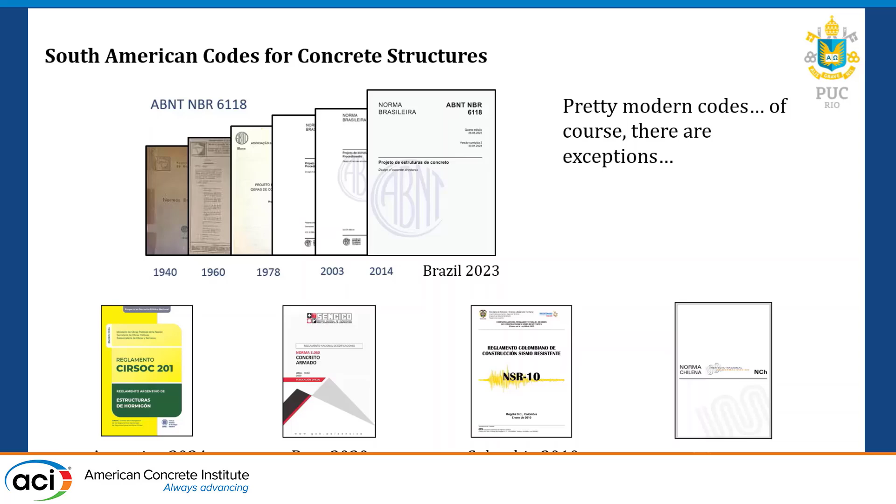Also, if you take a look into the codes in South America, you see that they are pretty recent and pretty modern codes. Of course, there are exceptions. I was talking to a friend from Uruguay, and he told me that the first concrete structures code in Uruguay was released in 2001, and it doesn't include prestressed concrete. And he told me, Mira, Daniel, we don't have anything about FRP here. Our code was born old, just like Benjamin Button. So we have exceptions, of course.

In South America, before 2018, we didn't have anything, just one manufacturer of FRP, and the main application was in soft eyes for tunnel constructions, and eventually on industrial projects. In 2018, for some reason that I don't know, suppliers started to bring FRP bars from Russia to Brazil, and we saw a proliferation of FRP bars in Brazil. And after 2018, with the pandemic and the higher cost of steel, people started to pay attention to FRP, but actually not for the right reasons. They are trying to reduce the costs.

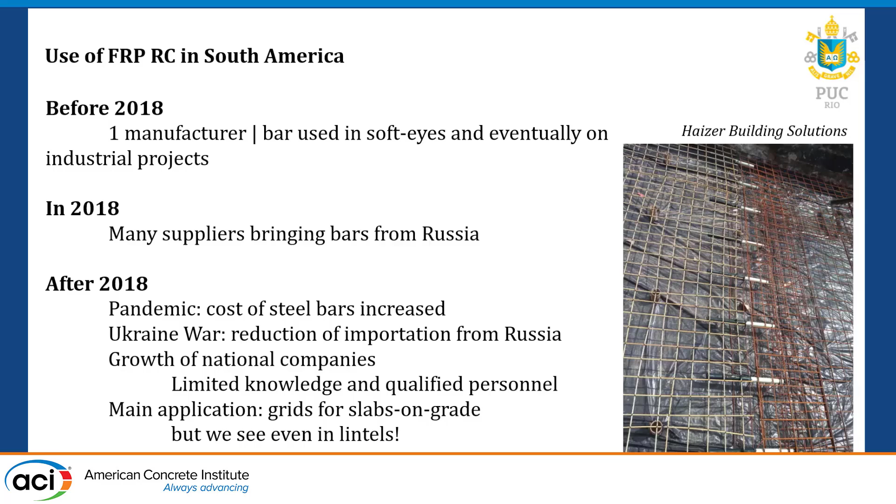And after we had the Ukraine war, which increased the cost of FRP bars imported from Russia, we saw growth of national companies, and we see that we have limited knowledge and qualified personnel. And what we see right now is the main application is grids for slabs on grade. But we see applications even on lintels. It's just a variety of applications.

So about the timeline of our code, this is mainly the FRP reinforced concrete code. In 2015, we had the installation of the IBRACON/ABECE TC 303. Ibracon is the poorer brother of ACI in Brazil. It's basically non-conventional materials for concrete structures. We have 5 working groups, and the third one is about FRP-RC. In 2019, we had that working group restarted after a long break.

In 2021, we developed a manual of practice, what you can see on the right. And after this manual was released, we installed a Brazilian Standard Association committee to develop 2 standards, one for material specification and testing, and the other one for structural design. And it's going to be released for public review in the next month or so.

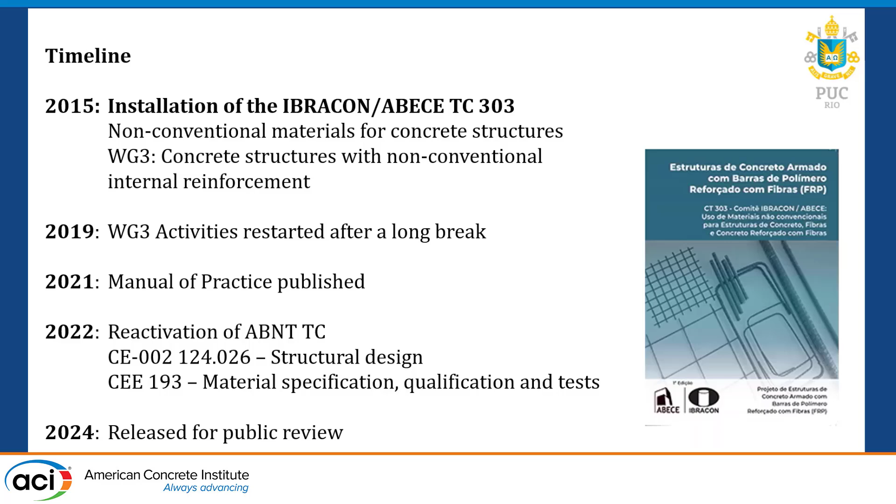So, main non-technical challenges. We have few researchers involved with FRP composites for concrete in Brazil. Limited technical data available in the country. Lack of knowledge of the community about composites in general. And also the industry flagship is basically grids and dowel bars, and we don't have a lot of data on that, so they are not very happy. They would like to see grids in the code, and I told them, please wait, let's release this, and then we start looking into this topic.

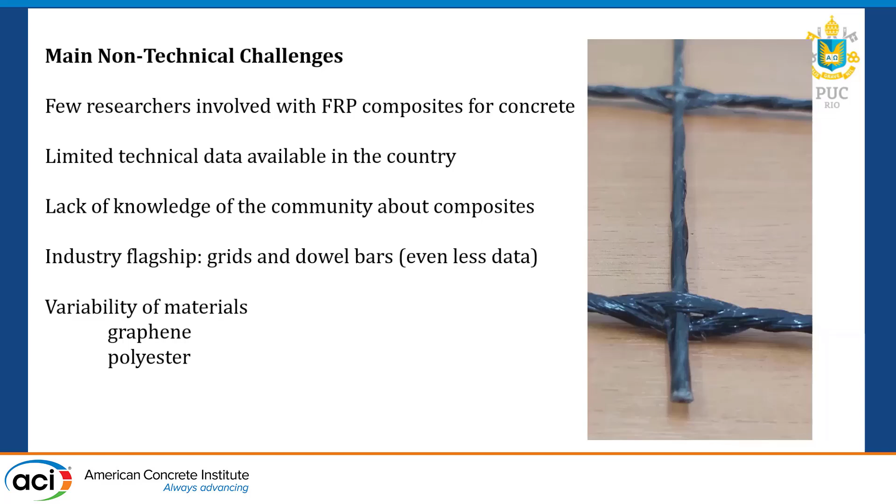And also variability of materials. There is a manufacturer saying that he's using graphene in the bars to increase the modulus. I really don't know if it works or not, but he's saying he used it. And a lot of manufacturers are trying to use polyester-based materials, which we know don't work well. Here you can see some pictures. The quality of the stirrups, we can see, is not very good in some of the cases.

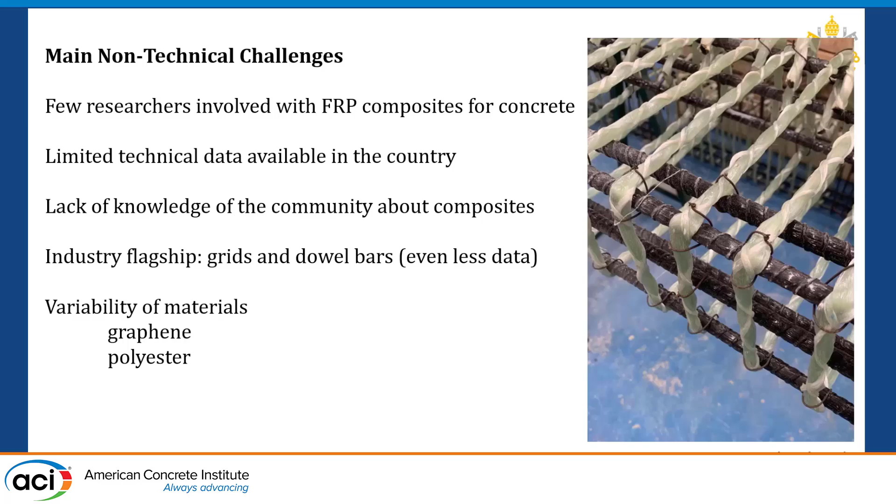So the scope of the codes: we are working with concrete with strength up to 50 MPa, with or without fibers.

We have vinyl ester and epoxy-based bars, bars with surface treatment meeting minimum requirements, physical and mechanical requirements. We allow combination of steel and FRP in the code as well, and temperatures below 80 degrees Celsius. No pre-stressing, no bundles, no hollow bars, or split cross sections in the case of grids. No fire, earthquake, or other type of exceptional limit states loading. No waffle slabs, flat slabs, punching shear, and

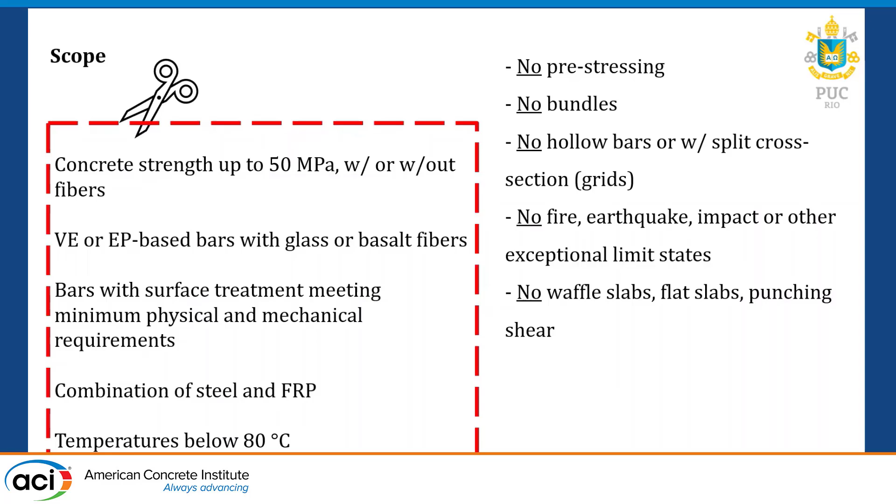so on. So the material specification, we have one main document with basic properties, required properties, and 12 parts describing physical and mechanical tests. And we have some original aspects in this code because the ASTM code recommends, not for qualification, for quality control, that you have to measure the Tg of the bars. But it's not easy.

We don't have a lot of equipment. We are a poor country in South America, so we are trying to adapt to this and try to use absorption results and apparent longitudinal shear to measure the quality of the matrix. So it's another way to try to measure that, although we understand that it's not perfect, but it is what we can do at this point. It's the best we can do, okay?

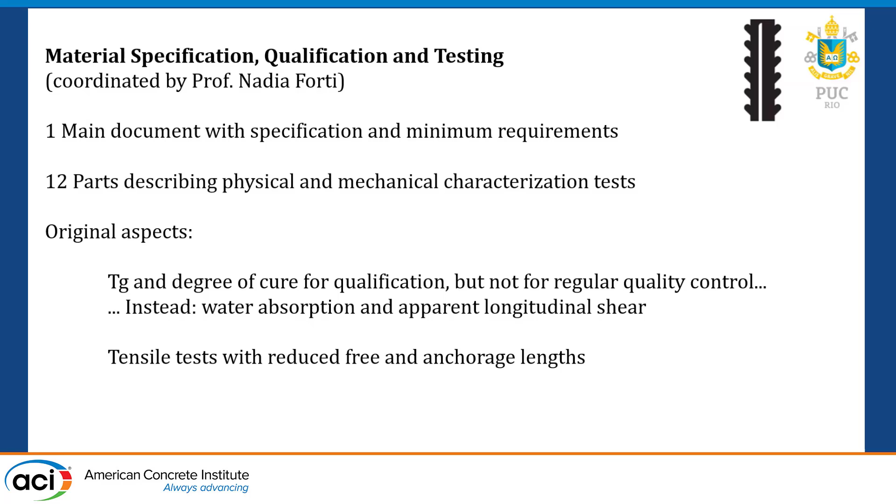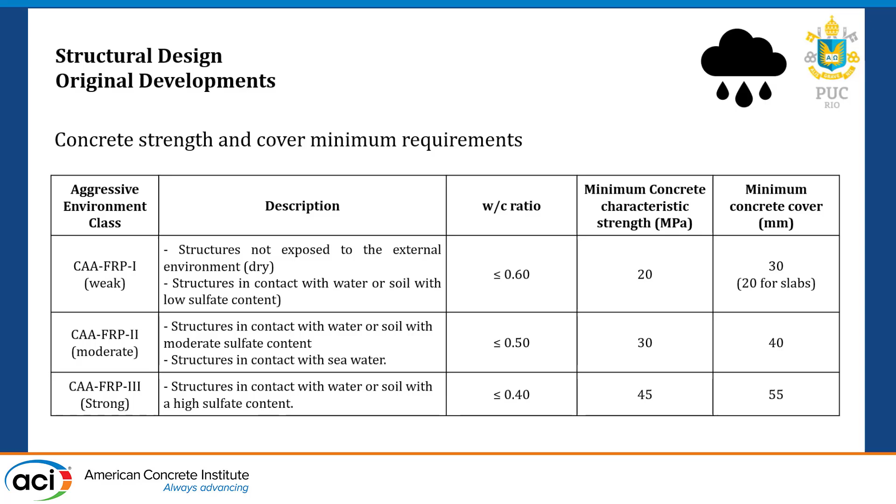Also, we are adopting a tensile test with reduced free and anchorage length. This is for structural design. We also develop our own aggressive environment classes with recommendations for strength and minimum cover. Our codes are also more like the European codes. We don't apply the partial factors to the strength equation, but we apply to the loading and then to the material strength. So we had some constraints while trying to calibrate the safety factors.

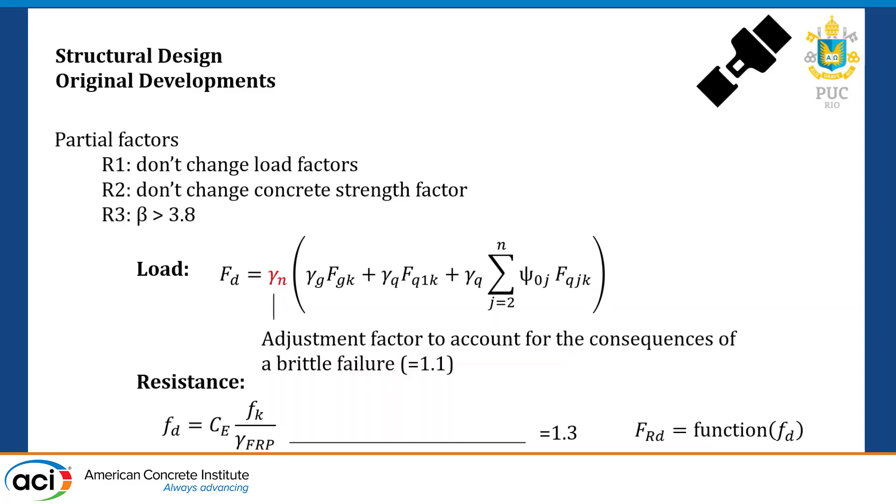So we have to add an adjustment factor to account for the brittle failure. And you see that we have a safety factor also for the FRP. And the calibration was done for reliability index greater than 3.8. So another thing is regarding uncracked and cracked stiffness in structural analysis, because in the recently released ACI code, you guys use the uncracked stiffness to obtain the bending moment distribution, but it may be quite different if you consider the cracked stiffness. So we try to include a recommendation based on this.

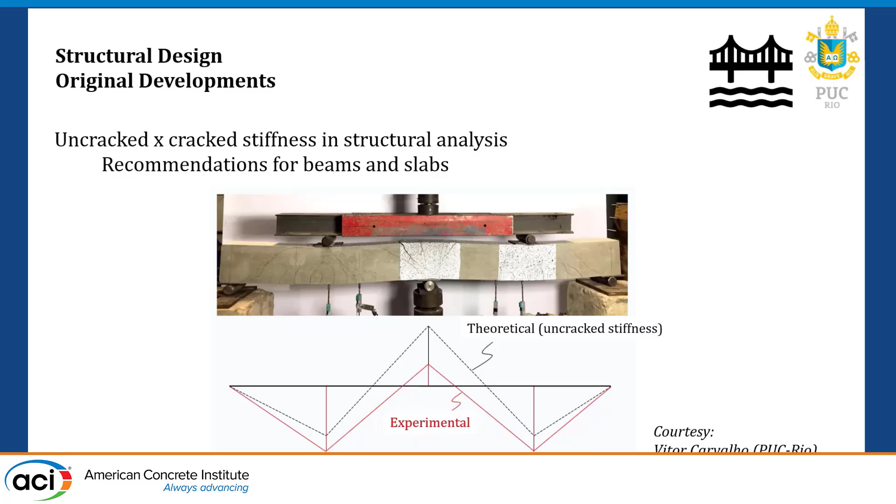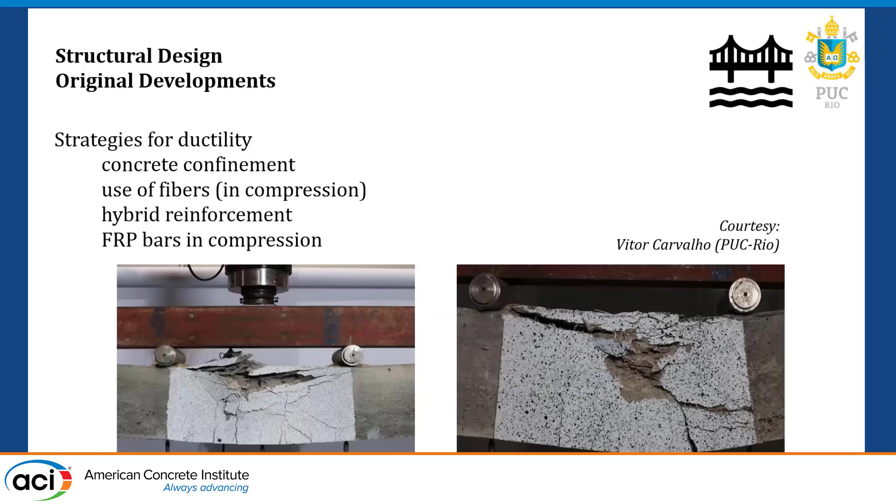Also, we made some recommendations for strategies for ductility, because it's a main issue. People try to put the FRP down, just saying that there is no ductility, it's a brittle material. So we are trying to include strategies for ductility. In this case, concrete confinement, use of fibers in compression, hybrid reinforcement, and even FRP bars in compression if they have appropriate stirrups to prevent buckling, for example, okay?

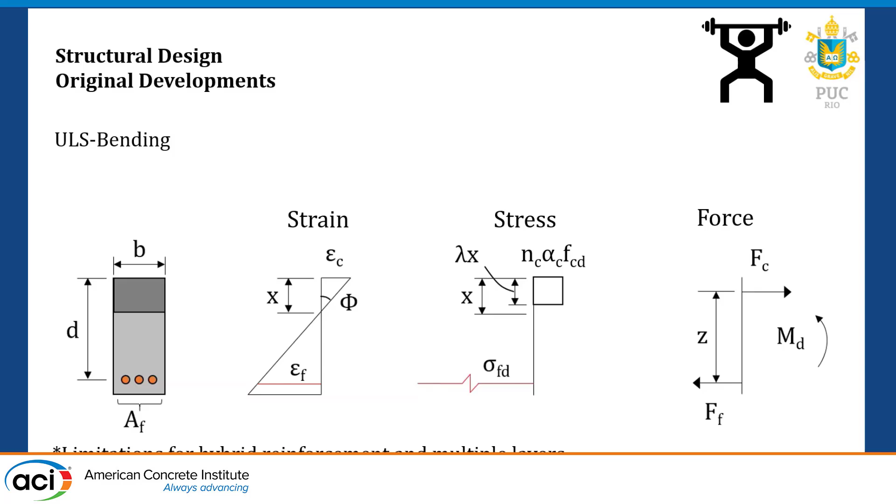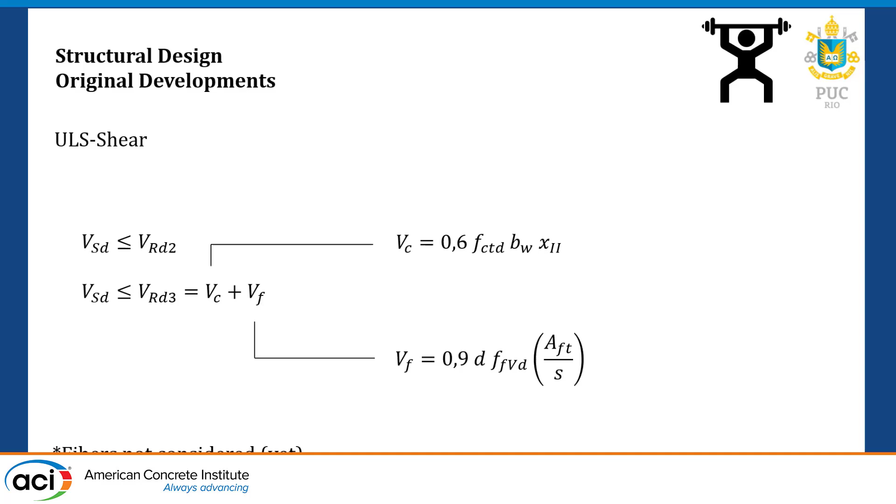So it's a simple model for bending, nothing new here, just a model based on the European approach. The shear, it's similar, I think, to the ACI, but we change a little bit the Vc component because we try to make it more similar to our reinforced concrete code, okay? And fibers are not considered, but it's something we want to do, to include fibers as a resisting component in shear.

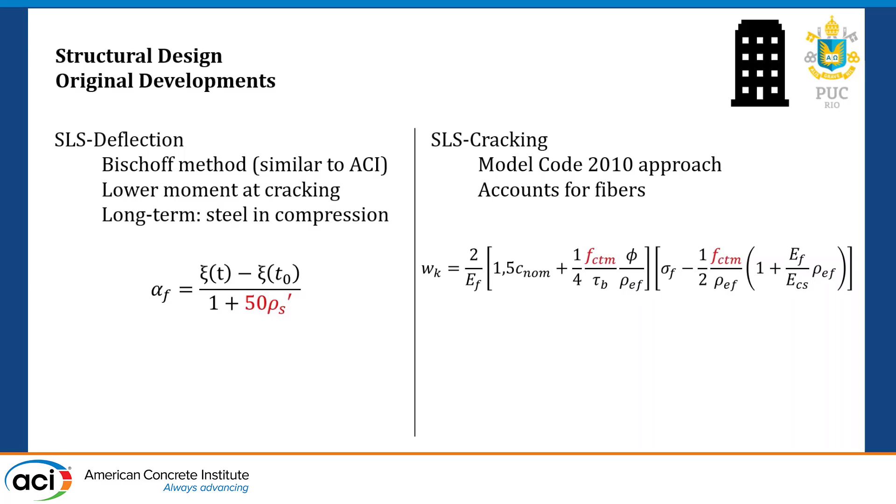Also for deflection, we are adopting the same equation as the ACI, but we are considering lower moment of cracking, okay, due to the introduction of a soft point inside the material. Also, we allow for the reduction of long-term behavior if you position the steel in the compression zone, okay. Also for the cracking verification, we account for fibers to reduce the crack opening by modifying the mean tensile strength of the concrete.

Okay? So just concluding here, the Brazilian code results from 5 to 6 years of work. It's a pretty modern code, original in many aspects, but not perfect. And the code will be really important to spread the knowledge about FRP RC and its safe use. And the committee will reunite again in the second semester of this year to continue the work, talking about grids, dowel bars, fire, punching shear, etc. And it's a merit of a very small group with very limited resources, but focused, highly motivated, and hardworking.